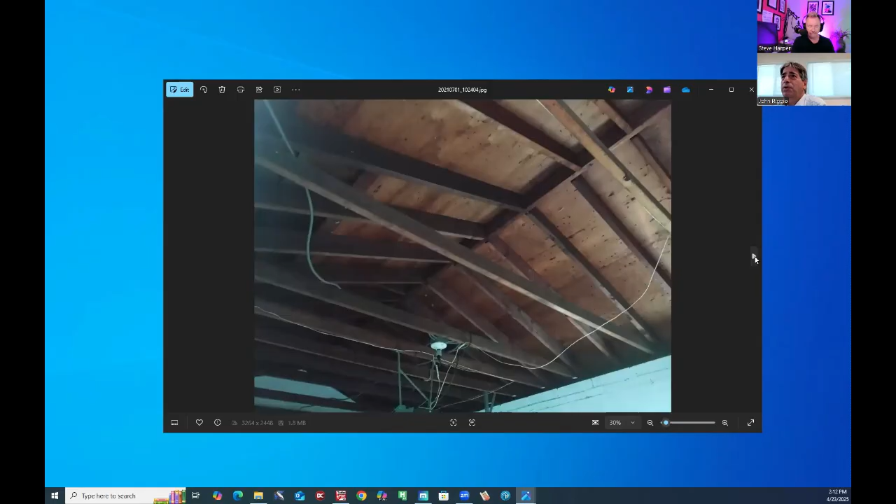Has some Bilco doors here going into the cellar, some cellar windows. The only thing with this house, as we went through the zoning, the garage was set too close to the side yard to add a second floor. So the whole garage, we removed it and relocated onto the other street. Since this is a corner street, the garage is now located on the other street.

In that challenge, I'm just kind of curious, John, was there any way to get a variance for that from the town? Sometimes you have to pay something for it. Was there any way to get around that, or it wasn't even a goal for you and the homeowners? Well, the borough here is sort of strict with the setbacks, and on this particular project they didn't allow any variance at all. There were only some things as we went through the architectural review on the house they might have allowed, but almost all the setbacks are within the new standards they have.

So this house overall started off as the idea of an addition, and as the job got bigger and bigger, the whole house is considered really a new house. It goes under the new code. And this here, as far as the pictures and the existing conditions, the house is in pretty good condition.

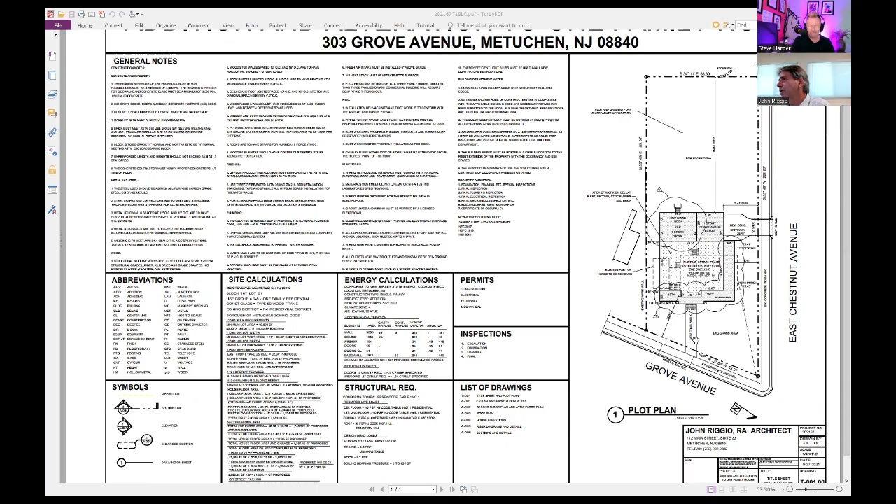I went through a number of designs, and here in the Borough of Metuchen, since the project went past a certain percentage, over 50%, it started to be considered a new house. So all the things with the setbacks, I think on here with the title sheet you can see the plot plan. And if you go over to the plot plan here, you can see that the existing garage was too close to the side yard, and also the existing brick addition on this side of the house over here was also too close.

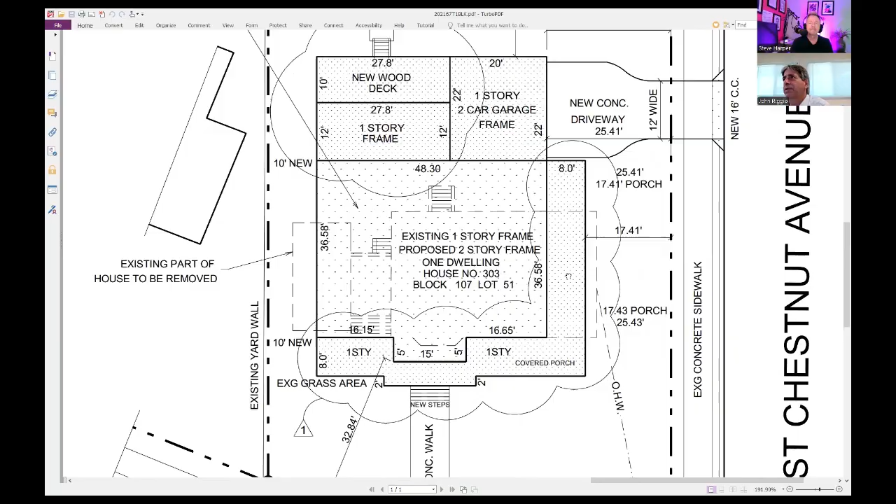So to bring this within the requirements that they have here with the zoning code, the small addition had to get removed. The old garage, the breezeway, is completely removed, and the foundation area, the rest of it is in use, but we added on to the overall size of the house.

This front area that's shaded in is one interesting feature of the zoning code here, and that is a covered porch. This gives you an extra 8 feet within the setback of the front yard, and you can also utilize that space. So that's one bonus they have here. And there's some requirements of keeping the garage behind that line of the porch. So that's one idea of this - use the porch, you keep the garage to the back, 8 feet behind the line of the covered porch, and that meets the zoning code here. There was plenty of room in the back of this property. It was very large.

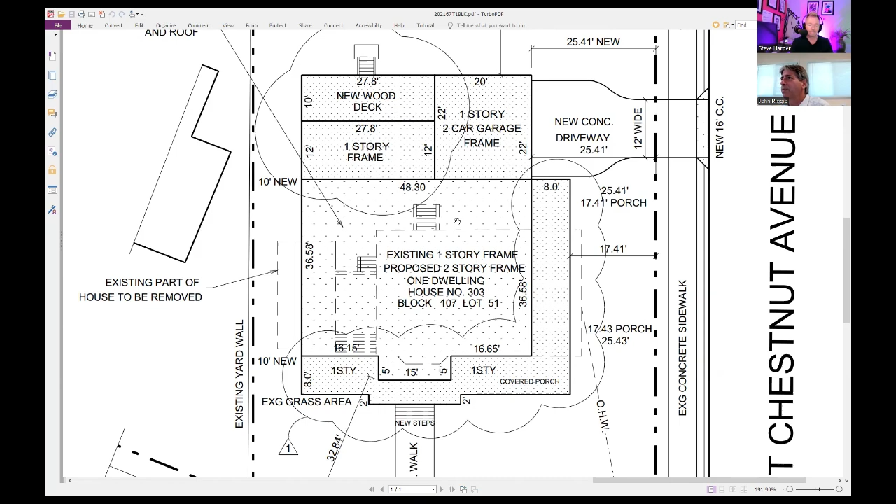And from there, we added a couple additions. One was to add a two-car garage with a new driveway and an addition to have a larger kitchen area, which I'll show in the pictures, and then a wood deck too. So there's a very nice wood deck there. And then in the front of the house, we made an entrance right from the sidewalk, and the old curb cut for the garage and everything is completely removed.

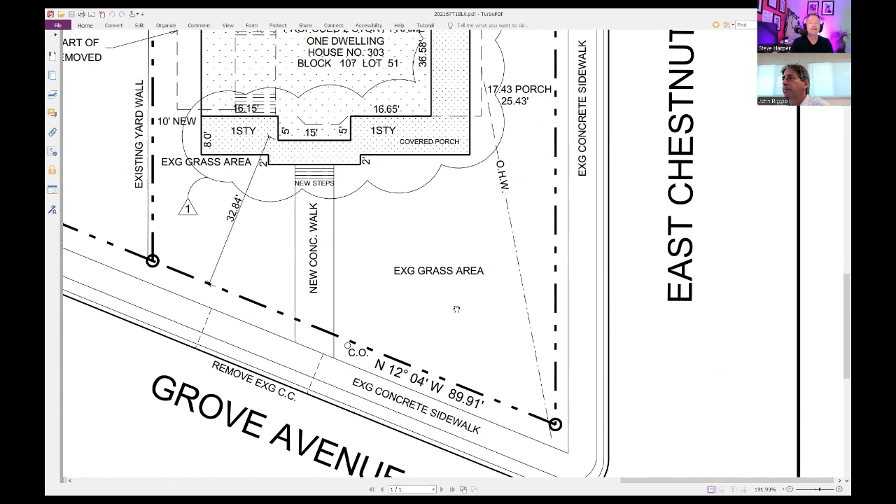So, John, I want to ask, looking at these plans - they're fantastic, so much detail, very easy to read.

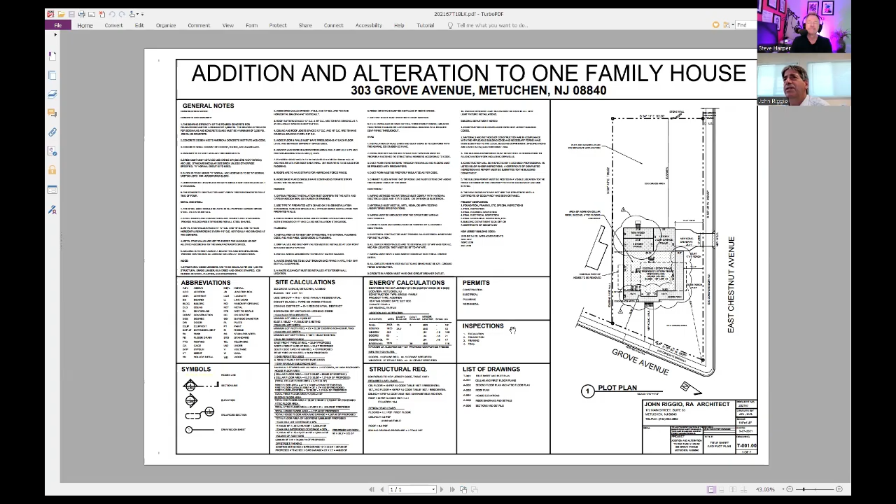There's sort of a cloud drawing, circles around certain things, like the front of the house and the back of the house. Oh yes, those are revisions as the house was constructed - small adjustments made to the property that I put on a revision. So those are revisions that are bubbled in, calling attention to changes made to your modifications.

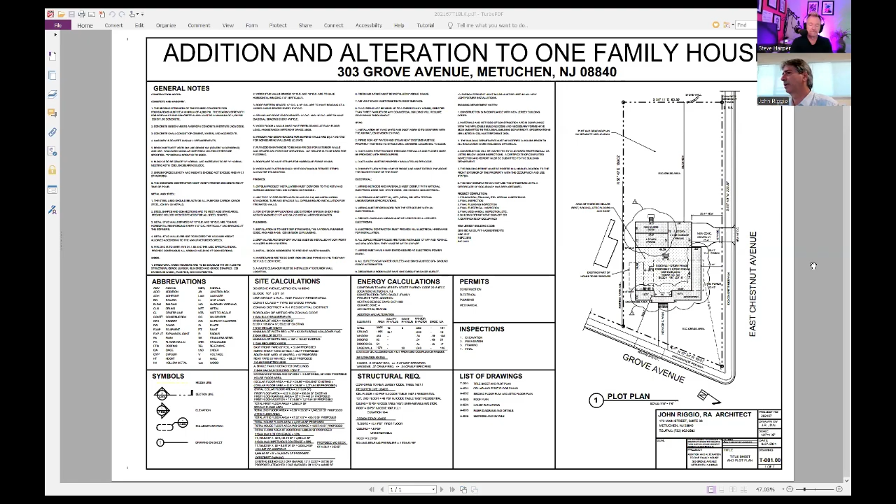Let me get the next sheet of paper on this. Let me get this here... I think I had it over here. Let me just get it on this sheet. Okay good, so this is screen one. Let me see if I can get the next drawing on here. I have to open up that file again - takes two seconds. I'm gonna go in and get the folder for this. The drawings consist of 7 drawings, and I'll get the floor plans in a minute.

How long did it take in total time to do the full renovation to add the upstairs? Really, the initial renovation of the house took about a year's time. But I think some of the things on this particular job - this had to go through some reviews from the borough, so there were some delays. It couldn't get approved right away, it took some time to go through them.

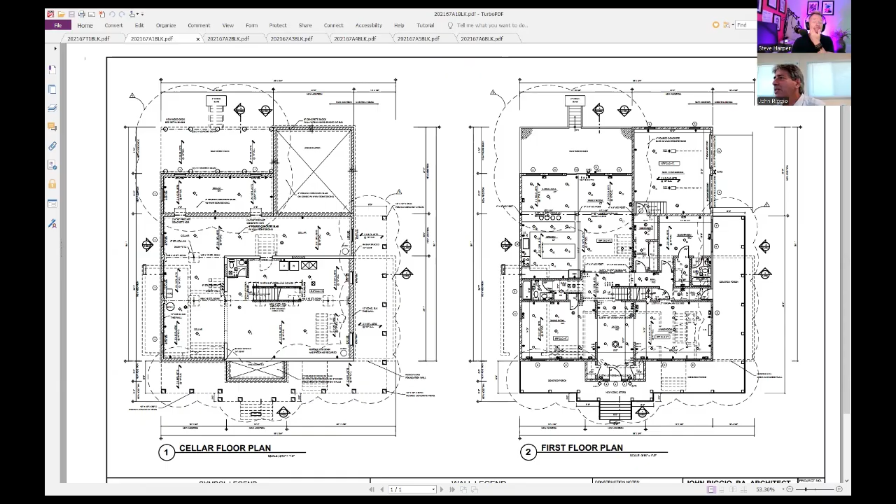Wow. As far as the porch goes, you'd exit to the front of the house, and you see they have the whole porch on two sides of the front. There's a lot of room here, and this works pretty good - it's very large, I'll show you a video in a few minutes. As you walk through to the right side of the living room, you go around the stair, which goes side to side - one stair goes to the cellar, the other goes up to the next floor.

Let's go to the next one - the second floor. When you go to the landing of the second floor, you have this hall that goes right around the whole stair, and you look into the double height space for the entrance. You have one, two, three bedrooms plus a fourth bedroom, sharing two bathrooms. Then there's a washroom in the middle of the floor, and a master bedroom with walk-in closets and a bath to the rear of the house. So everything is on here.

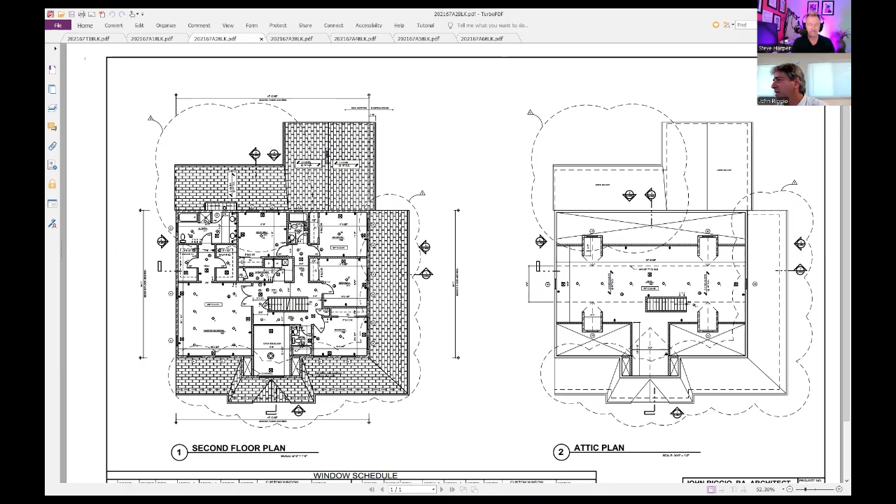Then this has a very nice attic space too. From there you can walk up that stair again going up to the attic, which has a stair with some nice windows in it. I have some pictures of the attic - it's somewhat large, came out nice and clean. Let me just bring this drawing here. So then from there we have the roof plan, which shows a basic roof.

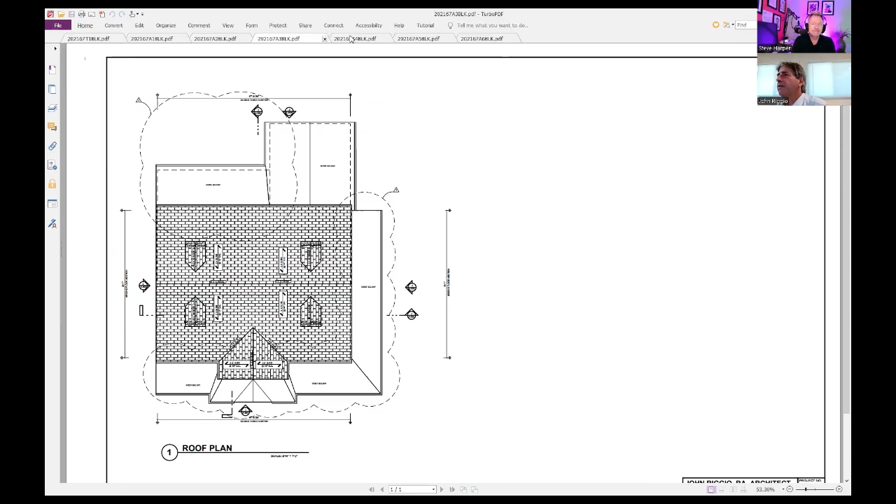And then from the next one is the elevation. So this is the elevations of the house. Let me just zoom out a little.

This is the first time I've gotten a chance to look at the renovation. Oh my gosh, I would have never imagined that you turned what we looked at previously into this. Wow, yes.

So this was just a small one-story house that had the breezeway and the garage, and it's completely transformed now. It's a very large house. It has a lot of nice features. It looks really good.

And from the drawings, they matched what it was constructed. Everything is on here, covered porch, the details with the windows, everything like that. So let me go to the next drawing.

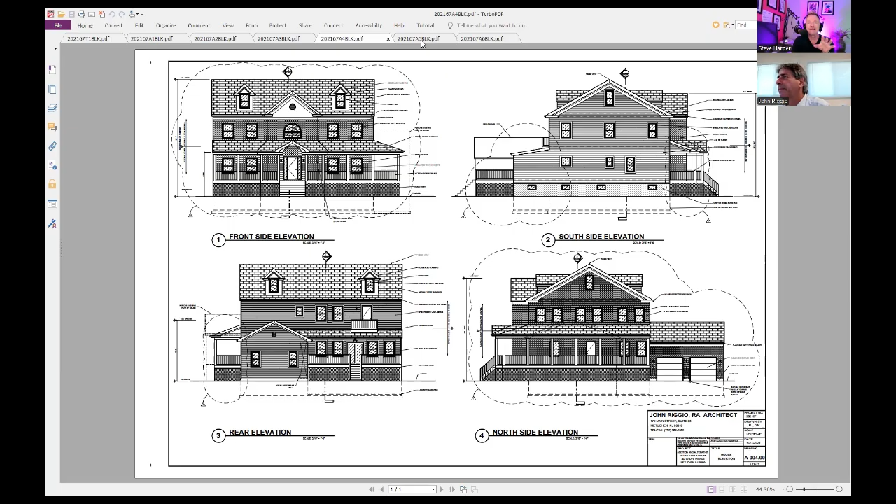What style would you say this is? Okay, this is just some details. This is it's a colonialish style. It's a colonial style.

And what's going on with the colonial style is really the outside of the house is mostly meeting the requirements of a colonialish style, and the inside of the house is still keeping a lot of contemporary features of the house.

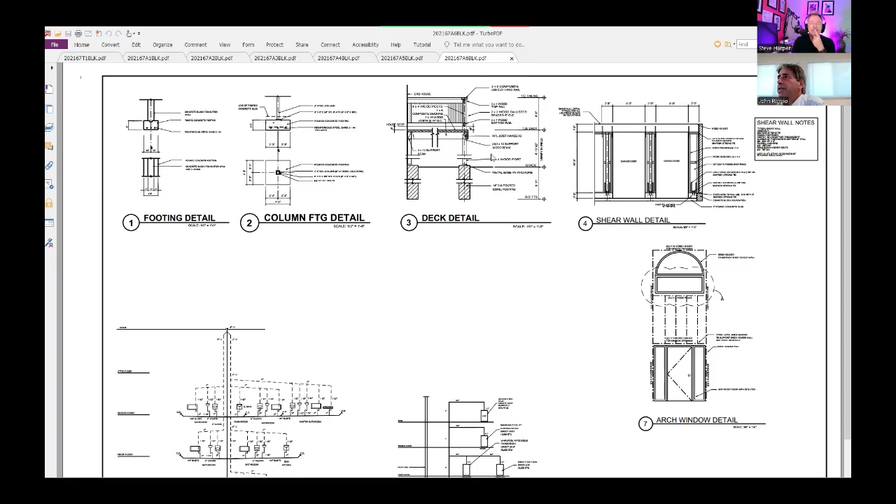The contemporary features, what I'm told, are more valuable. A standard colonial style house doesn't have as much value today as the contemporary style house. So the contemporary style house has a lot more value.

So we kept all the contemporary styles that we've been doing in most houses, and as far as the outside look of the house, keeping it colonialish.

I think some added features of the windows on the roofs and things like that made the attic a little brighter. I will show you those in a minute.

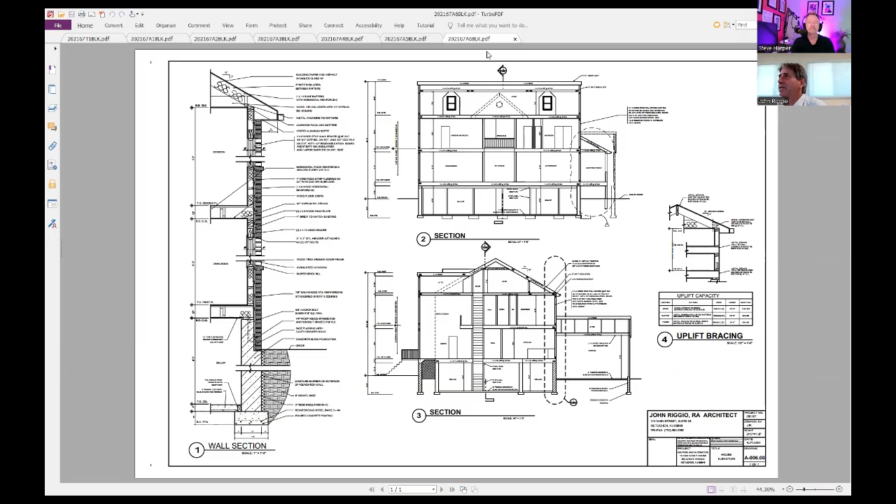So let me just close this and let's get to the next picture. It's some photographs. Okay, good.

Okay, so let's see, so this is here. I have two sets of photographs. Some of them are with a video, and some of them are still photographs. So let's go through this, let's see which ones these are.

Okay, this is a video. Wow. And this is just showing starting from the master bedroom. Love the freestanding tub.

Let's go to the next one. Now the next one is a little longer, this is a 3-minute video. Now it's showing the bathroom, see very nice marble tile there, molded doors, nice closet size.

Yes, this whole house has a completely new air system for the whole house, and that usually involves two units, one in the attic, one in the cellar floor. And this is going through the double doors going into the master bedroom.

You walk around, this is that walk around the stair I explained. You see the chandelier there, the double doors, the arch window.

It looks really good, it's a very large house. Is that part of what you call a contemporary style? Yes, it is. And this here going through the bedroom here.

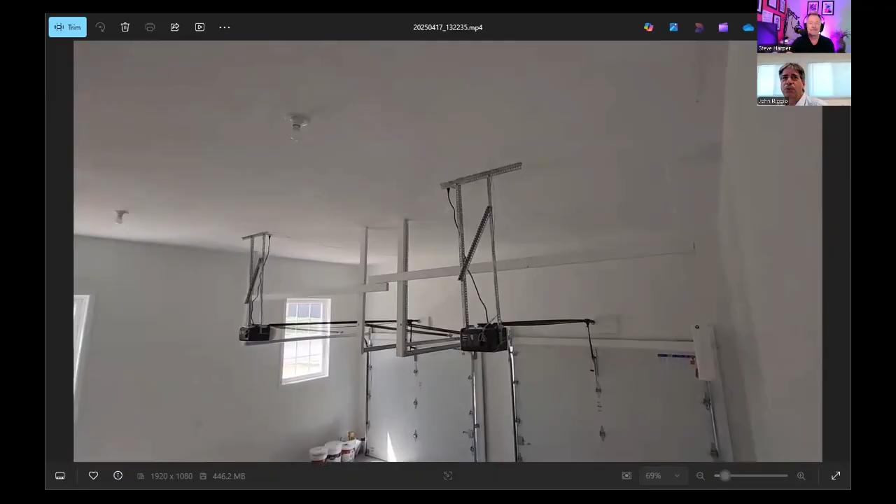I gotta tell you, wow, I don't even have words. We went from a house in comparison here.

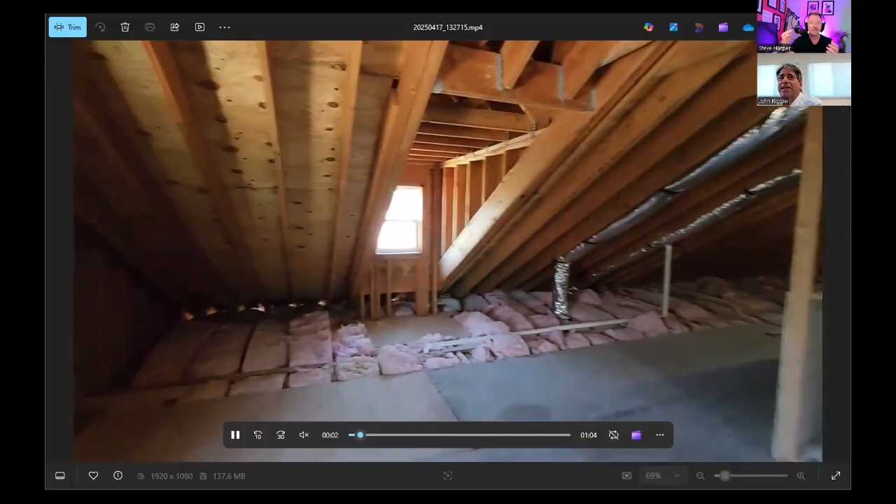This is the attic, with those small dog house windows on the roof. And I'm showing the structure, we have all the hurricane straps, the joist hangers are there, the tie wood bracing is there.

Now this is the second mechanical unit for the top floor, shown on the right side. This came out a very nice, clean, open attic space, so they could use this for storage.

This is key, coming from the experience of a one story that was turned into a two story. A lot of times the attic suffers and you have to squeeze in all the air conditioning because you're reconfiguring the house. You nailed it with so much space up in that attic.

I remember when I was in my attic after it was added to a one story, there wasn't a lot of space up there. You'd fight every time you walked along the rafters. This is amazing. Wow, wow.

Let me see, now this is the cellar floor. I just have some basic snapshots of it. Shows the stairs going side to side in the house, so it opened up a lot of room. This was just a crawl space.

We put some concrete on the bottom of the crawl space, which keeps all the different radon gases in the ground and things like that. This has the vent going towards the rear, and this is the other heating unit.

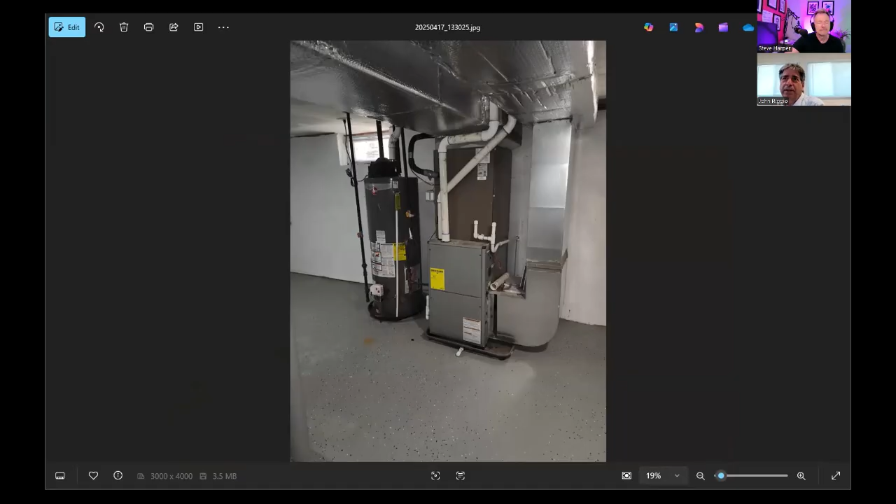Brand new direct vent, no more chimney, new hot water heater. This one they went with a tank hot water heater that is high efficiency. And this has two drains instead of just one, so we added a drain.

This is a video of the outside, a quick walk around of this whole house. So this is the outside, walking around from the rear of the property, and you can see that extension on the back with the wood deck. I see the doghouse windows from the attic space, the two windows for the garage, and the new driveway curb cut going onto the street.

And this is going across, keeping the AC compressors on the side of the property so they're not visible. This looks spectacular, and that side yard where you have the neighbor and a fence right next to the house.

I love that you hid the compressors over there where not a lot of traffic is going to go through, maybe a 10-foot difference between the house and the fence. You could have put it someplace else where it would be more visible. You really effectively used the space that you had, which in the beginning, one story, wasn't a lot.

Just amazing. When was this completed, John? This was just finished last week, I just went there and took these final pictures. It's fantastic, been going on since the year 2001, and there's been a lot of work going on for this house with the existing conditions and the approvals and everything, finally getting the finished product.